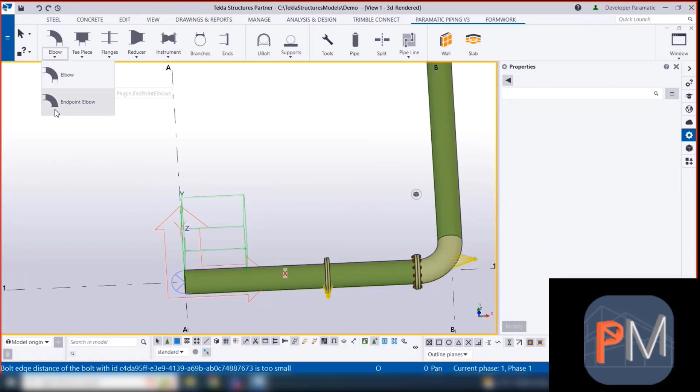Endpoint elbow endpoint. You can add endpoint fittings, for example, if you would like to tie an elbow into a tank. Select the pipe you want to use and then click on a point. This point will indicate the direction in which the elbow needs to point. Now you can select which elbow you would like to insert.

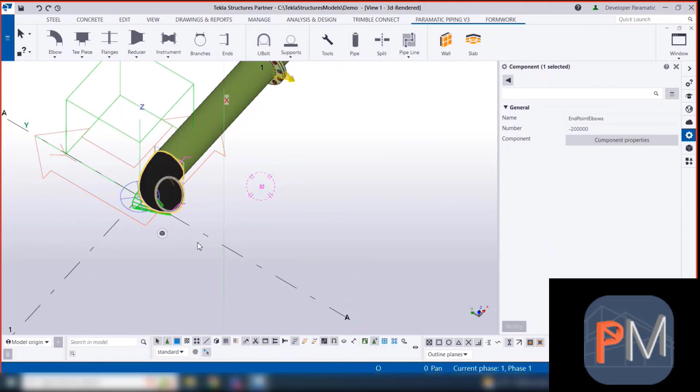You will be able to use this point to move your elbow around. If you need the elbow to point slightly upwards, for example, you can adjust the direction and it will update the elbow. This can be referred to as a Tekla detail type connection, and the point is the controlling point of the connection.

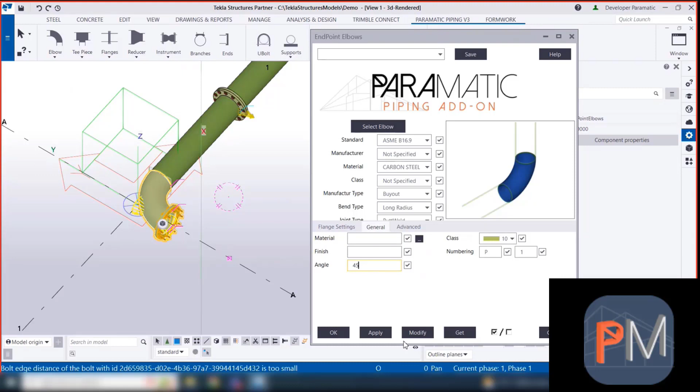You can change the details of the primary and secondary beams. Go to the General tab. For example, if you require a 45-degree angle, you can edit the angle to 45 degrees. Select Modify. As you can see, the line is still pointing in the direction that you selected. If you move this point to the other side, the elbow will follow.

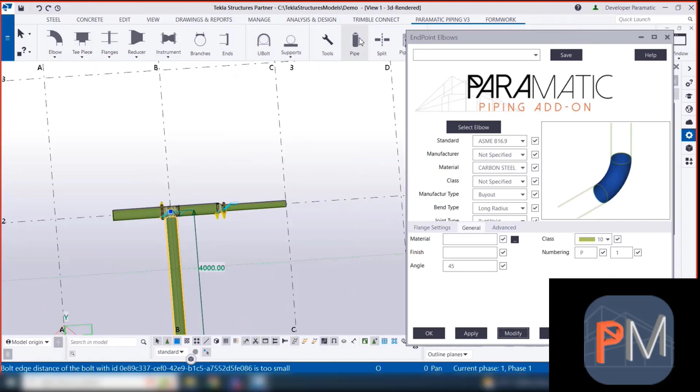T-endpoint. The endpoint T-piece works similarly to the elbow endpoint. You can only add an endpoint which has one end instead of two ends. Select the endpoint T-piece. This works the same as before, in the case where the first acts as a run pipe and the second is a set-out pipe. Select the type of endpoint T-piece required.

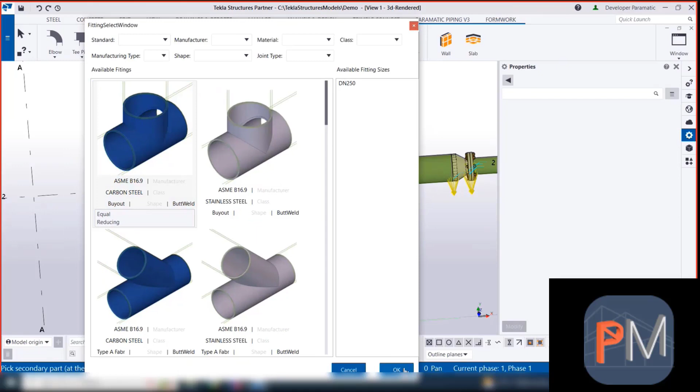If you'd like it to point in the other direction, select the run pipe and the setup pipe. Now you can amend it. You can also choose from caps and socket weld caps.

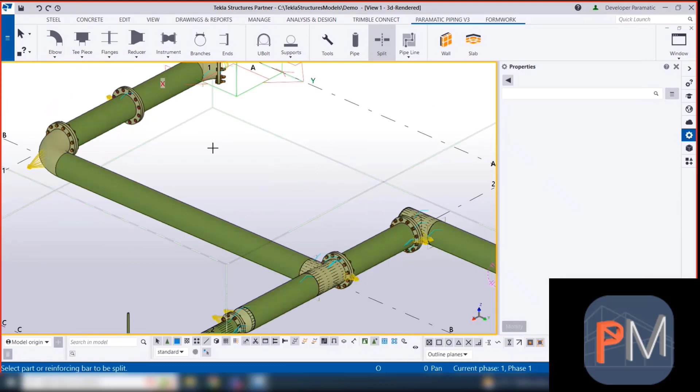Adding an instrument. Add a split to the pipe. Select the instrument and then filter according to the requirements. Please note that these are mostly representations of the actual sizes. However, we ensure that the overall dimensions are according to the catalogs.

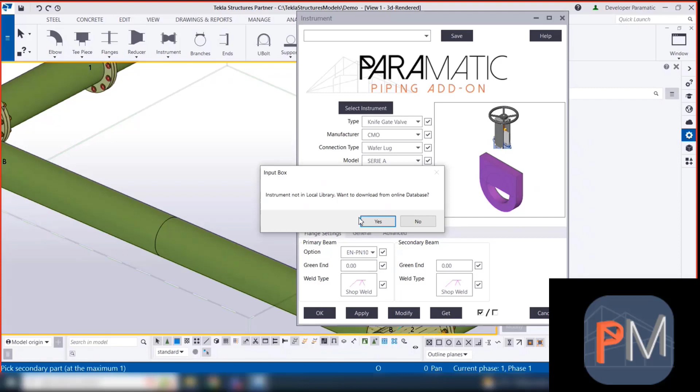Select the stem. Ensure that your connection standard and your primary beam for the flange PCDs correspond with each other. Apply the settings. Now click on the two beams. An input box pop-up will show up asking if you would like to download this item from our database.

Select Yes. This will insert the instrument. In the General tab, you can specify an instrument number. You can adjust the instrument orientation to 90 degrees.

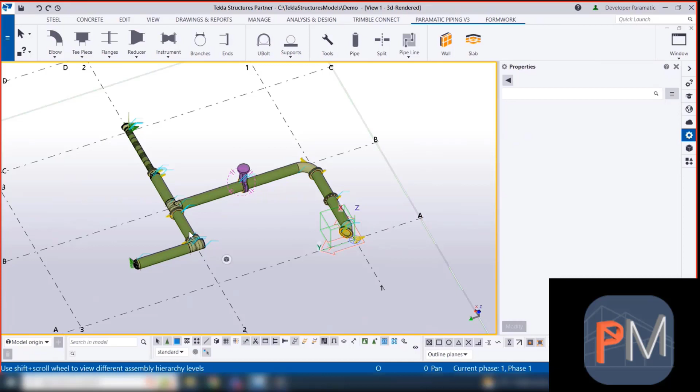Heading to Drawing and Reports. Click on the Tools icon. This is where you can control the lines with. We use all of our pipes in separate spools. These spools are the same as assemblies in Tekla.

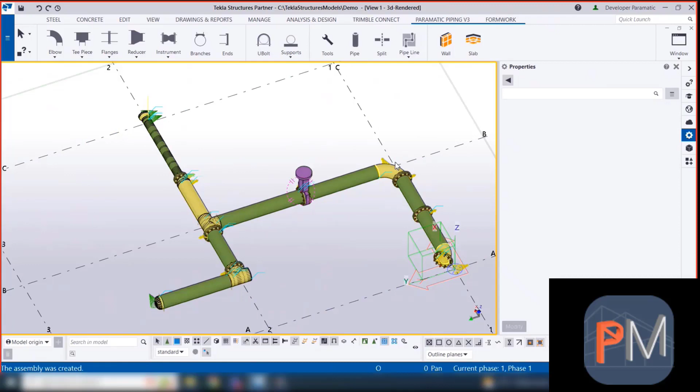Click on Pipeline and select Create Line. You can select all the assemblies or spools which form part of this pipeline. Click on the middle mouse button or spacebar to create the line. This will be in one assembly in Tekla.

To open the line editor, click on the Tools icon in the ribbon. You can now assign properties to this line. The prefix will be used as the line number. The spool number will be used to separate the spool pieces.

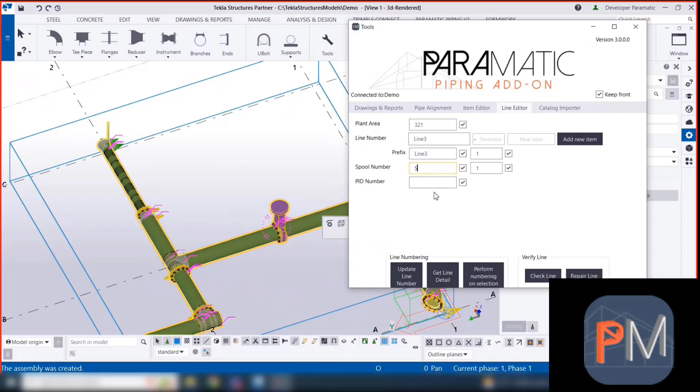Select Update Line Number here. On the right-hand side, you will see that it will set the assembly numbering to line 3 and the start number to 1. Your separate spool pieces will be called line 3 with the S for the spool separator. Tekla only allows 20 characters for the assembly prefix, which now leaves 18 characters. You might find that you will now run out of characters for the prefix due to long line numbers. This feature is used to create longer line numbers, and is customizable to your needs.

If you require something specific, for example size, it is added as an option here. Here you can specify that it is a 250 line. This will now appear in the line number. The same can be done for content.

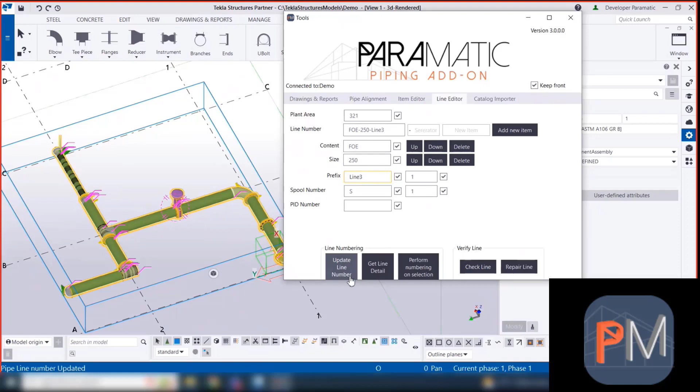You can choose what needs to be displayed first by selecting the up and down buttons. From here you can click on Update Line Number. On the right you will see that the prefix does not change, but when you inquire the object, the information will be given.

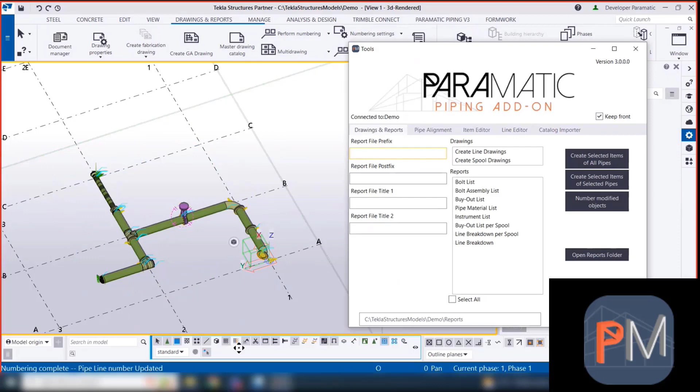Navigate to the Drawing and Reports tab, where you can create both line drawings and spool drawings. From here you can also run a few reports like the buyout list report, pipe material list report, and a buyout list per spool report.

Click on the Create Selected Items of selected pipes. From here it will start the drawings.